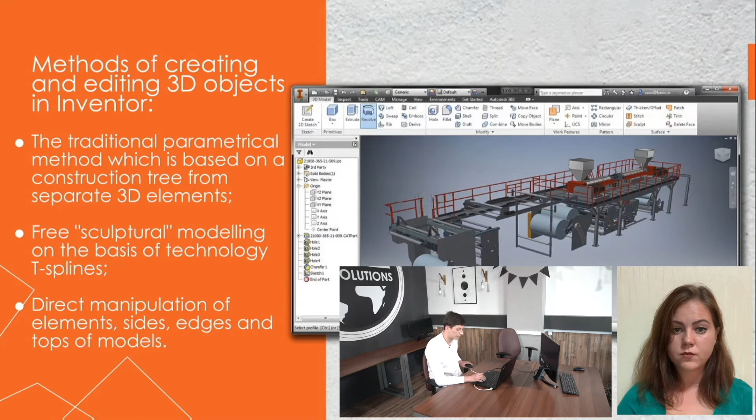Let's consider what possibilities are offered to us by developers from Autodesk and the other systems. Autodesk Inventor is a computer-aided design application developed by Autodesk. It does 3D mechanical design, simulation, visualization, and documentation. Autodesk Inventor has an intuitively clear interface and supports various methods of modeling of 3D models of any complexity. It is possible to flexibly combine solid state and surface modeling, and also models as a triangular grid.

Almost every three-dimensional operation is based on one or more sketches. Autodesk Inventor is equipped with the most powerful area of 2D and 3D sketches, allowing creation of profiles and trajectories of any complexity.

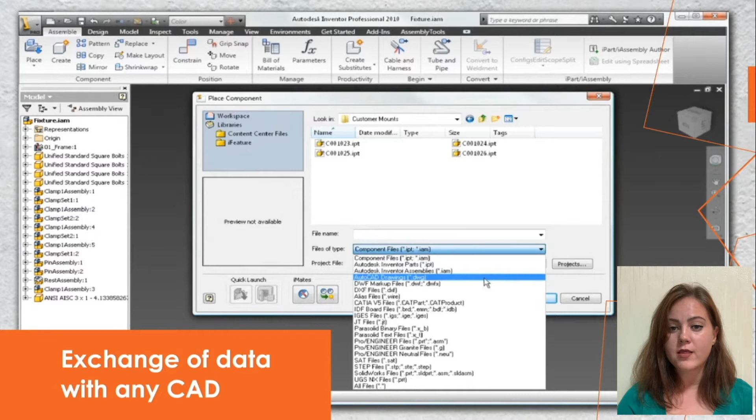Autodesk Inventor allows, as quickly as possible, collecting components in one assembly for research of parameters and functionality of a product. In the assembly environment, there are tools for search of crossings, visualization, and analysis of kinematics of the model. It automatically forms and updates the product structure in the project development process.

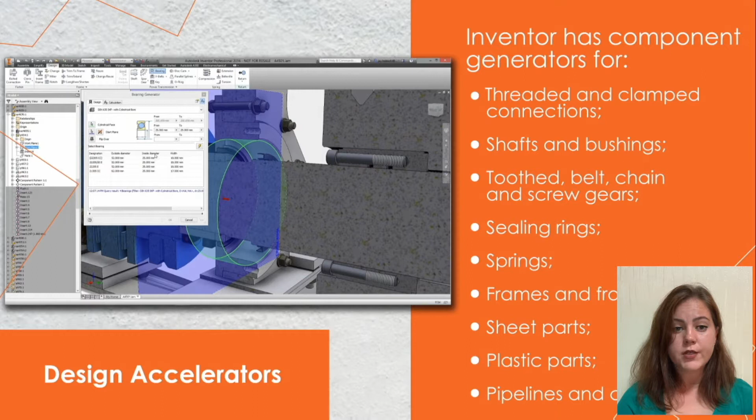Autodesk Inventor supports a set of file formats both on import and export. It is possible to open directly files of the majority of widespread CAD from foreign manufacturers, as well as neutral formats. In this case, it is possible to continue editing this file in the initial CAD, and the user of Inventor who has inserted this file into the assembly will immediately see any changes made to it.

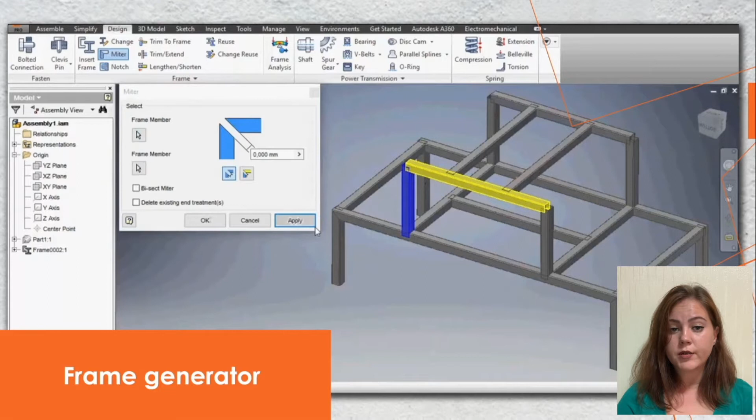The set of design accelerators is based on standard mathematical formulas and physical theories used in the design of various mechanical systems. Based on functional requirements for a mechanism, generators automatically create a 3D model of the required typical component. In the design of parts and products, parameters such as power, speed, torque, material properties, operating temperatures, and lubrication condition can be set as input.

Inventor's frame generator automates the development of steel frame structures with a set of specialized tools and a library of standard profiles. The module provides the location of profiles on a given frame, the use of various methods of connecting the profiles, and the application of welds.

The module of designing details from sheet material in Autodesk Inventor is equipped with a rich specialized toolkit. Besides work with a sheet, there is a library of sheet styles. Also, this module automatically builds a detail sweep, supports its associative communication with a detail, and supervises correctness of constructions.

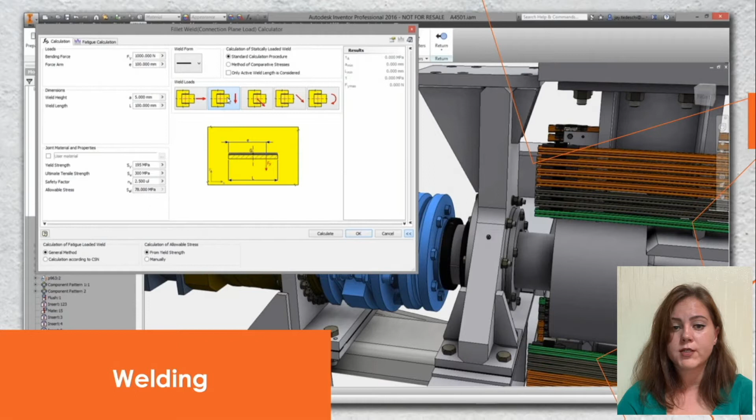You can also automatically create internal and external processing contours, manage contour sorting by layer, transfer the model coordinate system, and enable spline approximation. In Autodesk Inventor, there is a special environment for designing welded structures, including functionality for pre-processing of a product, cutting of edges, drawing various kinds of welded seams, and finishing machining of the welded product.

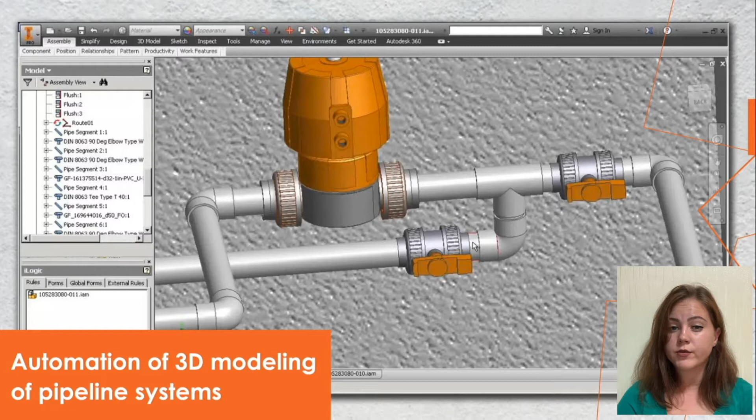The module is equipped with specialized tools which provide a visual representation of welds on the three-dimensional model and drawings. For creation of three-dimensional models of pipeline systems, Inventor Professional also has a special internal module. It allows creating the shortest and most efficient routes of pipelines, providing full associativity with surrounding geometry of a product and observance of construction rules set by the user.

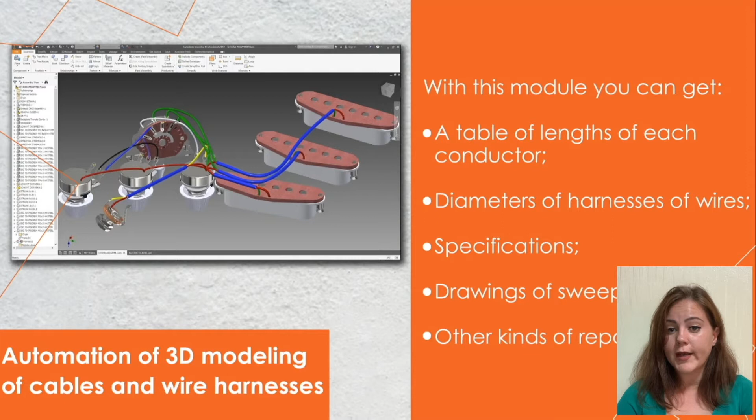The cable connection design module in Inventor Professional provides the easiest and most convenient way for mechanical and electrical designers to work together. The table of connections can be set in Inventor Professional, or imported in XML format from specialized electronic CAD software, for example AutoCAD Electrical. The module is equipped with specialized tools for construction of routes and associative binding to surrounding geometry.

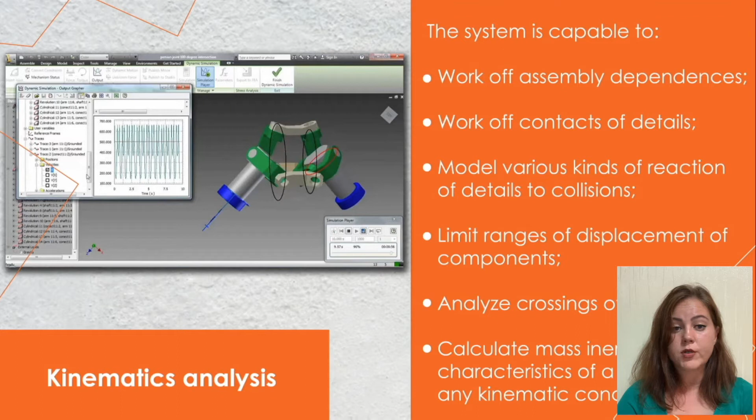Autodesk Inventor allows you to investigate kinematic schemas of projected mechanisms directly in the modeling environment, at the level of geometrical dependencies between them. The results of the analysis can be obtained not only as 3D visualization, but also as automatically generated charts and reports, with results uploaded to Excel.

Autodesk Inventor Professional is equipped with a module for durability analysis using the finite element method. With this module, the user can simulate the behavior of a detail or assembly under loading, determining the presence of deformation, its degree and character. It allows not only finding weak points of a design, but also optimizing products, for example saving material by removing surpluses in places where it will not affect durability characteristics.

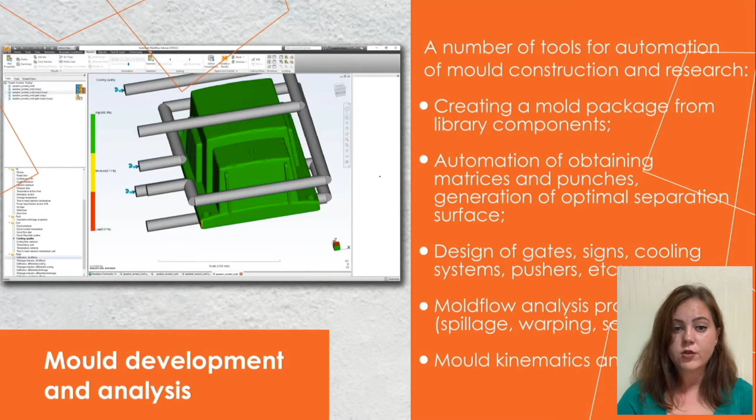In Autodesk Inventor Professional is built a specialized module for automation of construction and analysis of molds for molding plastic under pressure. The module is equipped with a library of components for compression molds, and a number of tools for automation of their construction and research.

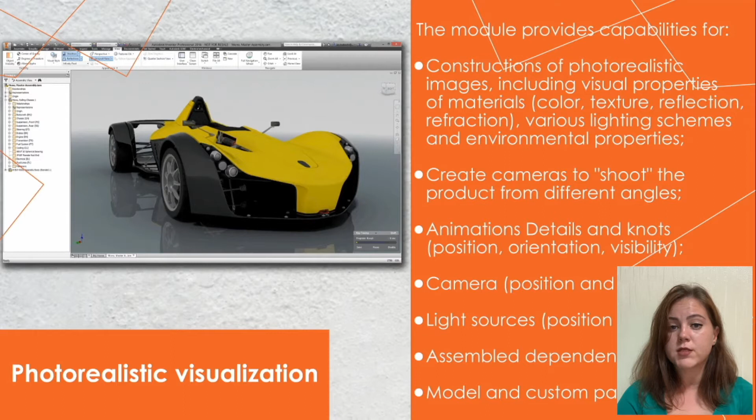Working directly in Autodesk Inventor, it is possible to create photorealistic images and animation rollers of your products by means of Autodesk Inventor Studio. It has rich functionality and a simple, intuitive interface that considerably reduces the time expenses for preparation of presentations.

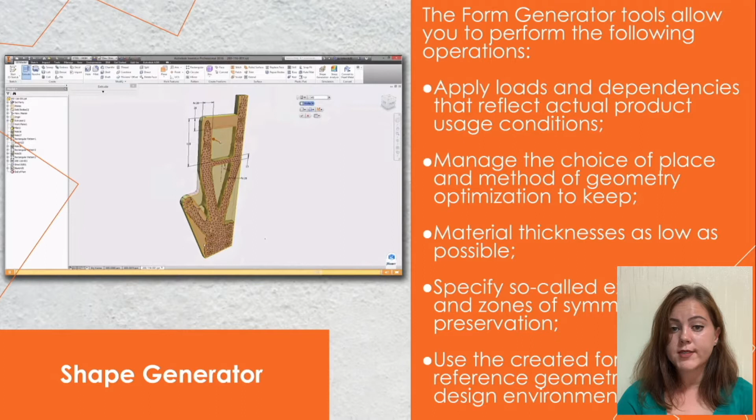Shape Generator allows you to automatically generate the optimum form of a detail. The initial data is taken from a user-defined set of fixtures, loads, and other boundary conditions. You can use this module to explore design possibilities early in the design phase, and to optimize the shape and weight of already designed parts.

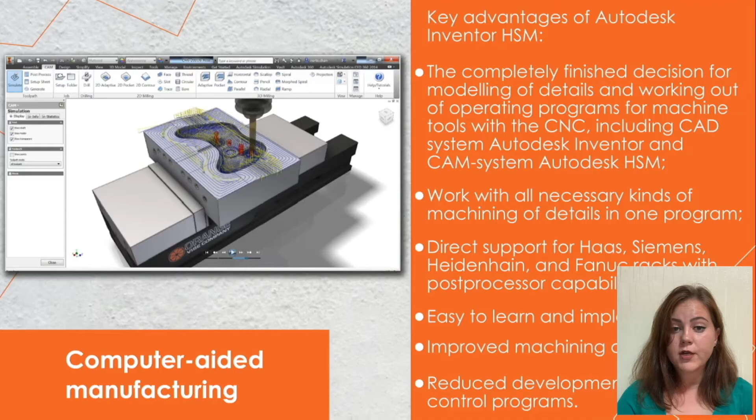Autodesk Inventor HSM is the CAM system integrated into the CAD system Autodesk Inventor, intended for working out and verification of operating programs for machine tools with CNC. Autodesk Inventor HSM can be successfully applied both in laboratories and in design services of industrial and repair enterprises.

So, now we've talked about Inventor. Let's talk about what SolidWorks is. I will tell you in a few words what it is, in comparison.

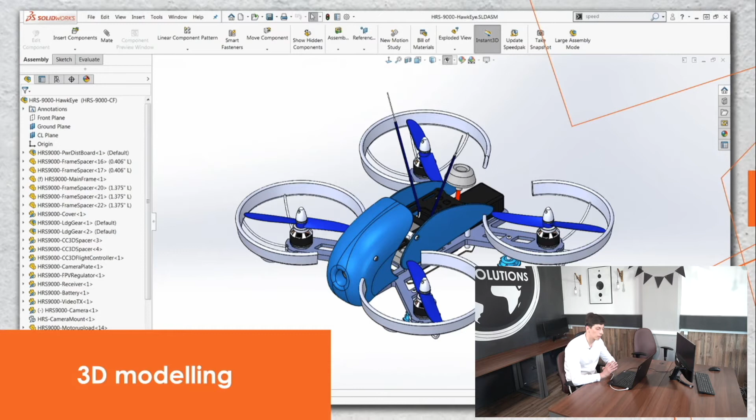SolidWorks is a solid modeling, computer-aided design, and computer-aided engineering computer program. SolidWorks includes up to 10 basic configurations, in which several dozen application modules are combined. In addition, there is a separate set of different options for each license, which would require a separate webinar to review.

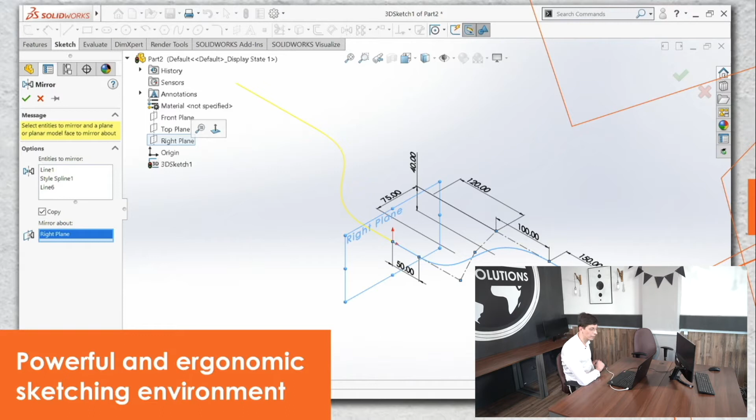So, in a few words, we begin with 3D CAD. It is the backbone of the entire SolidWorks suite for industrial designers and manufacturers. SolidWorks is easy to learn and rich in functionality, helping you speed up your product development cycle, lower cost, and ensure high quality.

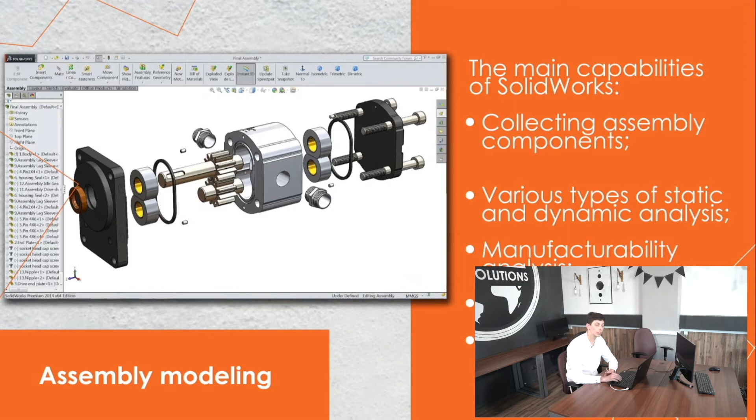You can create not only solid models, but also import, create, and manipulate surfaces, and generate 2D drawings from 3D solid models. With fully integrated drawing, your team can create drawings right from the models, ensuring accuracy and preserving correspondences. To make drawings in SolidWorks, you generate them in the 2D drawing and drafting systems.

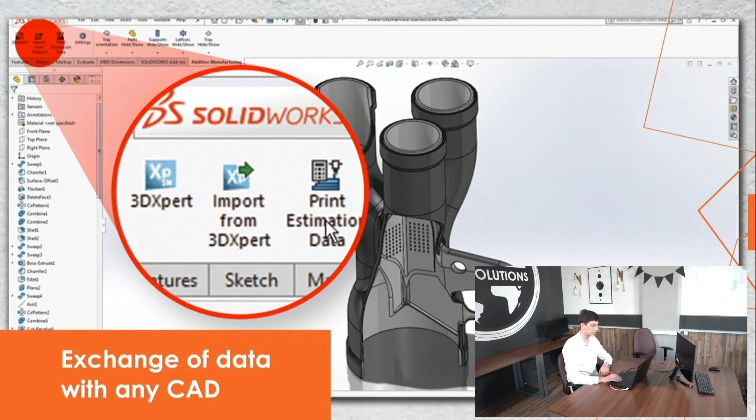SolidWorks allows you to build complex assemblies with many components. Assembly components can be comprised of individual parts or other assemblies, called sub-assemblies. An assembly can be created using bottom-up design, top-down design, or a combination of these methods.

For data exchange, SolidWorks supports over 30 formats for importing and exporting designs from other CAD programs, such as Unigraphics, CATIA, or Inventor. This procedure is also possible with other non-CAD programs, such as Adobe Photoshop or Adobe Illustrator.

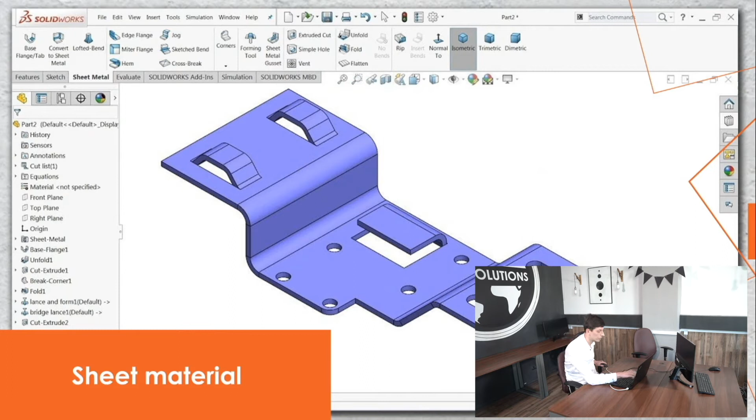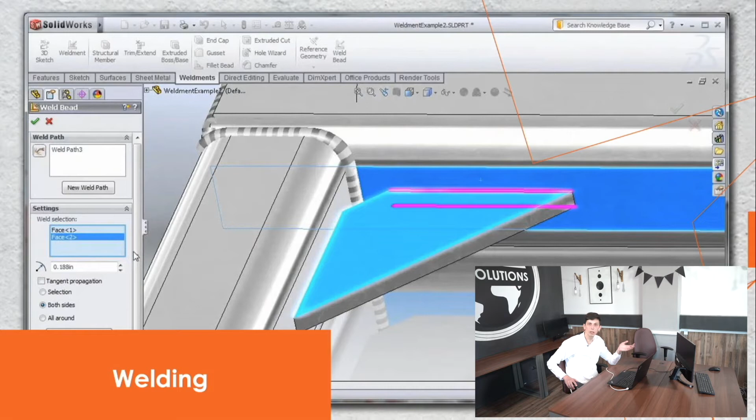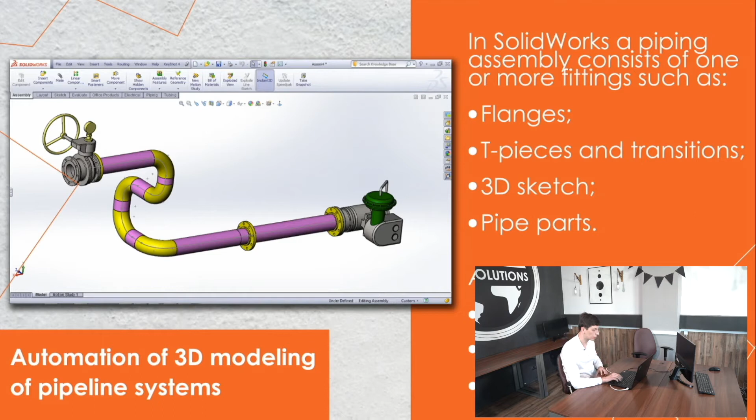Parts designed from sheet metal in SolidWorks don't require any reference to the parts of which they are composed. However, you can design a part within an assembly that already contains some components, or create a part by changing the parameters of another part in another document.

You can work with welding construction in SolidWorks by using weld beads. These calculations are made easier and more accurate by defining weld material, mass, cost, length, and time.

Next, typical piping. It consists of pipe lengths connected by elbows, T-pieces, and reducers, with flanges placed at the end of the pipeline. When a piping assembly is created, the application places it into the current assembly.

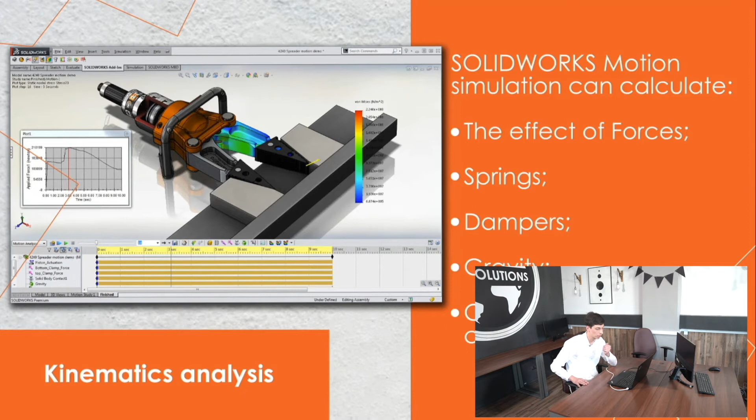In general, there is also an electrical part. Any electrical connector contains at least one connection point where a cable begins or ends. This principle helps you design connectors in SolidWorks, no matter if they have single or multiple pins.

Next, SolidWorks Motion. It is used to solve kinematic and dynamic rigid body problems. In this analysis, the designer performs an accurate physical calculation of the forces and movements of the assembly.

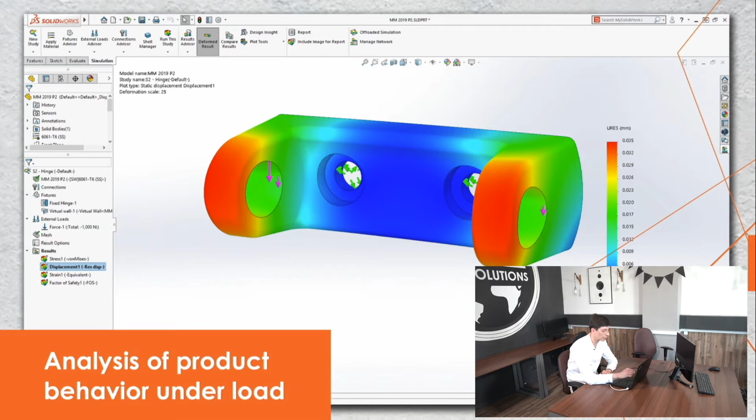By specifying loads such as joint force or acceleration, you can easily perform structural analysis of assembly components. The calculation of the safety factor makes it possible to assess the reliability of a fracture criteria-based structure.

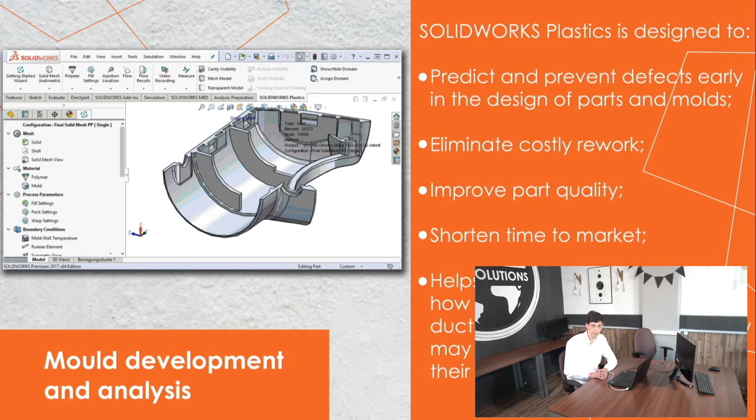After performing a static study, you can calculate the safety factor of the model. To calculate everything in SolidWorks, you need to know the mechanical properties of the material, know the loads on the part, and determine the restrictions on the propagation of loads.

Now, SolidWorks Plastics. It works directly on your 3D model, avoiding file format or compatibility issues. It is designed so mold designers are able to quickly optimize multi-cavity mold or feeding systems.

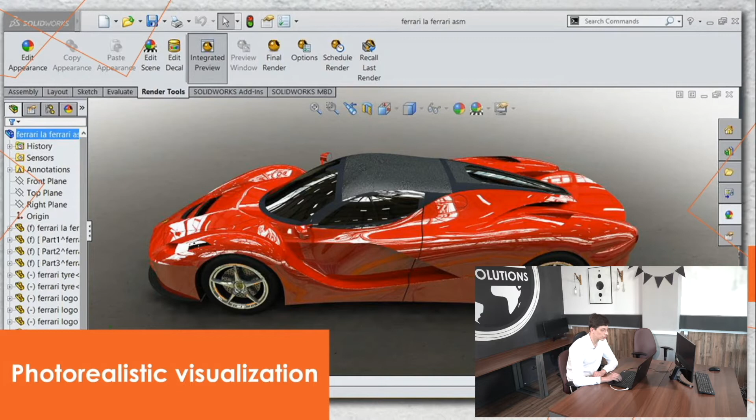Photo View 360. It is a SolidWorks add-in that produces photorealistic renderings of SolidWorks models. The rendering image incorporates the appearances, lighting, scene, and decals included with the model. This is an environment more similar to photography versus technical rendering, with the focus on 3D data.

Because results are indistinguishable from photos, they can be used directly by marketing or other areas where physical prototypes don't exist or would add too much cost.

Topology study. It helps you achieve maximum optimization of geometric parameters while taking into account design relevant constraints. As a result, you get an optimized component considering both mechanical requirements and manufacturing capabilities.

SolidWorks CAM. It is a 2.5 axis milling and turning solution powered by CAMWorks. It combines design and manufacturing capabilities in one application with a simple interface.

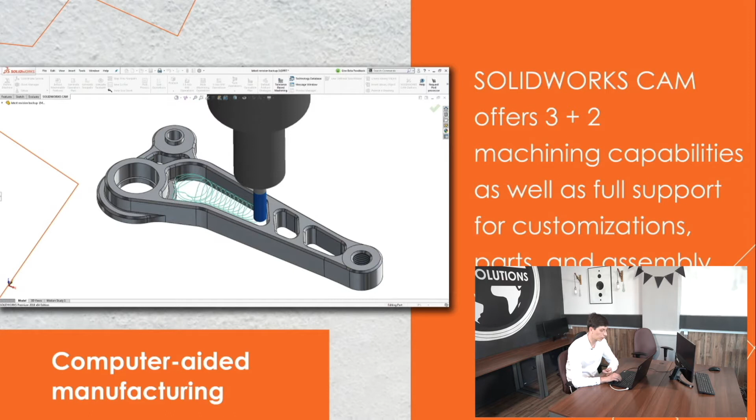The result is a user-friendly, rule-based system that you can use to save time and money by applying company standards, as seen in machining strategies and tolerances, reducing errors and improving quality in all machining steps. So that's all about the SolidWorks overview.

Listen, if I want to buy something, there is the question of costly licenses. How to understand such a complex issue? That's a really good question.

There are a lot of features, more or less important, and everyone has their own list of important technologies. We've tried to make some packages, and here is the result with the most important information for any engineer.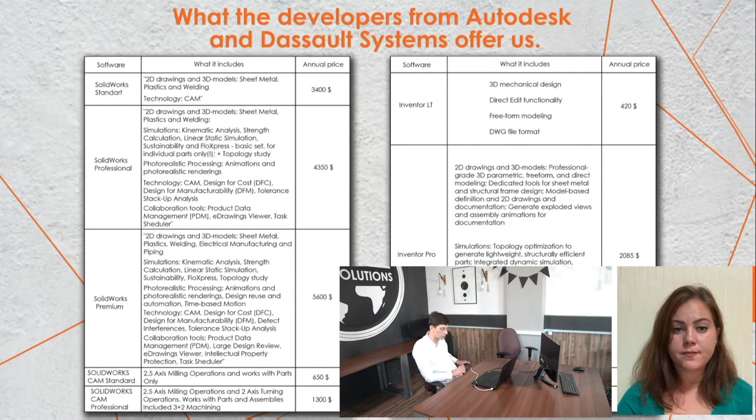Okay, now we know what these programs are and in what form you will be offered to purchase them. But nevertheless, for me personally, just information from the internet isn't enough. After all, whatever the manager buys, his engineers have to work for maybe 5 or 10 years with this software. So who knows if it's comfortable to work with, and which factors are important.

Vladimir, I think it's time to talk with our experts, Denis and Ivan. You are right, Olga, let's discuss it with them. By the way, they are here already. Guys, we're already waiting for you.

So, here are our experts. Hello, hello Ivan, hello Denis. Hello Vladimir, how are you guys? We are very good. Ivan? Great, great, nice. So let's start.

Yes, let's start. Guys, where did you work before GFE Solutions? What's your experience? Now I am a team lead engineer at GFE Solutions, but before I worked at several companies, and I have 7 years of experience. 4 of them were with Windchill and Creo Parametric software, and then I worked, as I work now, 3 years in Autodesk Vault and Autodesk Inventor.

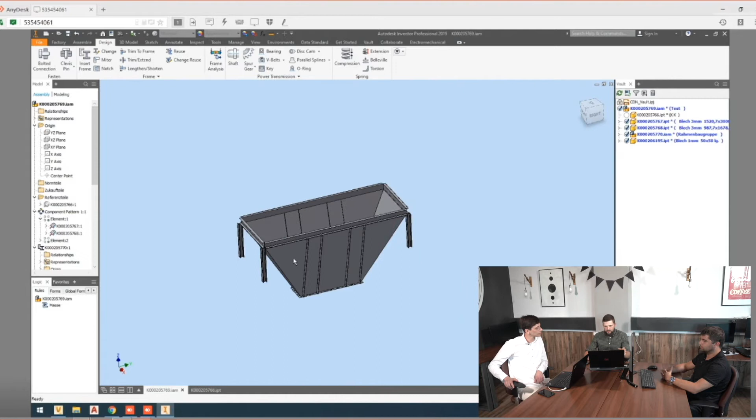I can show you how it works in Autodesk Inventor and Vault. Now you can see on screen just an example, one of our constructions. It's only beams and some profiles, and I want to describe the idea of work in this way.

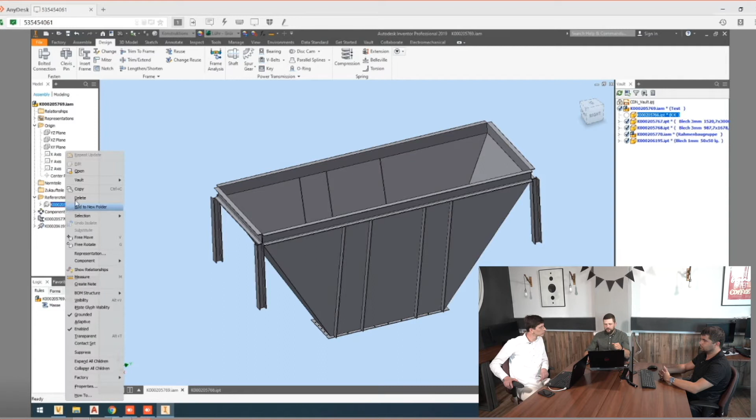You can see here that I have a basic part. I use the function derive, and I want to show you what that means. So I have one part where I have all planes, sketches, solids, and some surfaces that I will use in my construction, in my parts for the future. And I have this model, and when I update it, all my construction will update also.

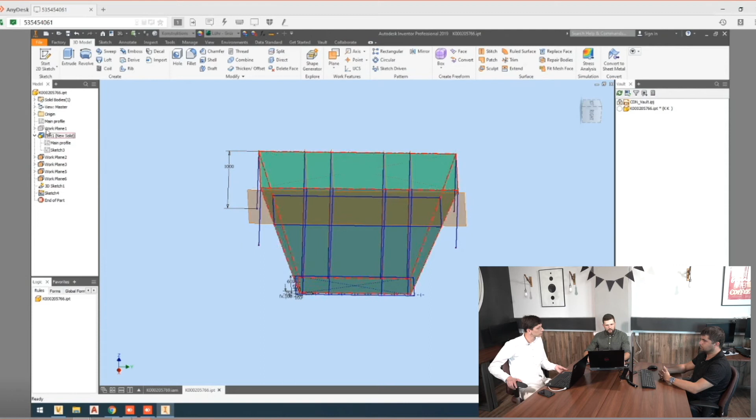For example, here you can see this model, with some sketches and planes, and my model looks like this now. If I just update some dimensions here, like this, and here like this, and maybe the height of this construction, so minus 1,500, and here maybe 800, so I update this a little bit, and here it looks nearly the same.

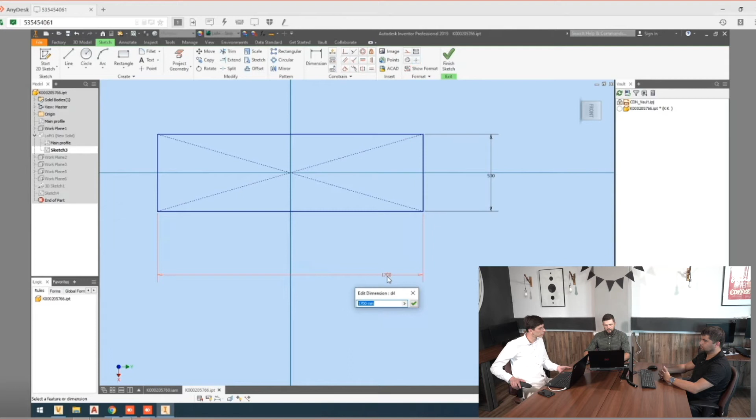But now I will just refresh my model, and here you can see that it looks the same, but with different dimensions. I can also, for example, change the bottom flange like this, so you can better see how it looks. And then I will refresh again, and you can see that it updates automatically. All connections stay the same, and you don't have any problems with intersection somewhere.

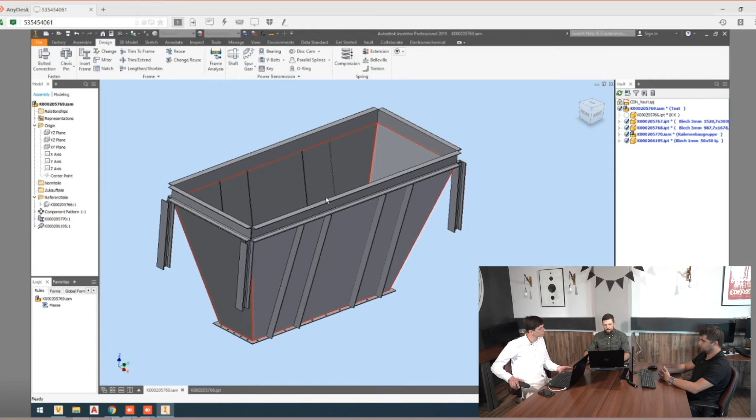So this is the idea of how you can use this basic part to create big constructions with a lot of sheet metals, a lot of parts. For example, I can show you how it works with a part.

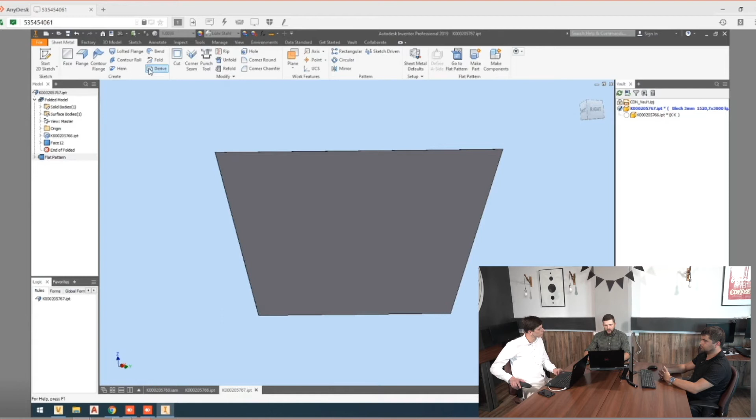When you have a basic part, you should first create parts like a sheet metal, and then you use this function derive, and you choose your basic part. When you get this part by derive, you can choose what you want to get from this part - some sketches, or maybe only solid or surfaces, and you will use only a part of this main part. So this is how derive works.

All this part will be assembled without any constraints. You just connect it together by default, and they will stay in the right position.

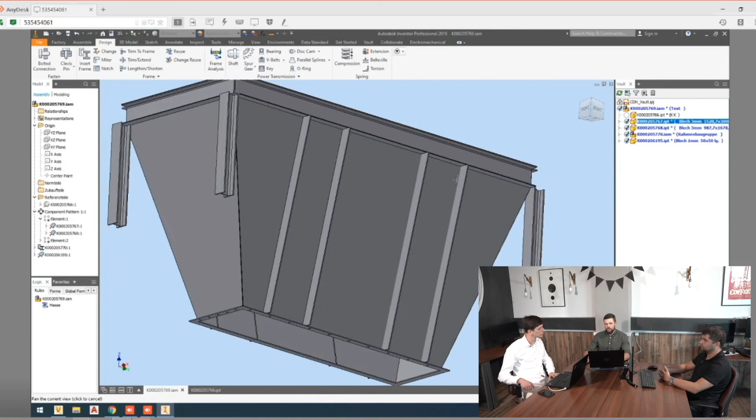And the second part that I want to describe is the frame generator, and in Autodesk Inventor it's realized very well. You can create beams and steel structure very fast, maybe in 1 hour if you have a basic part. You can create big constructions with all connections, and you will not have any intersections between them.

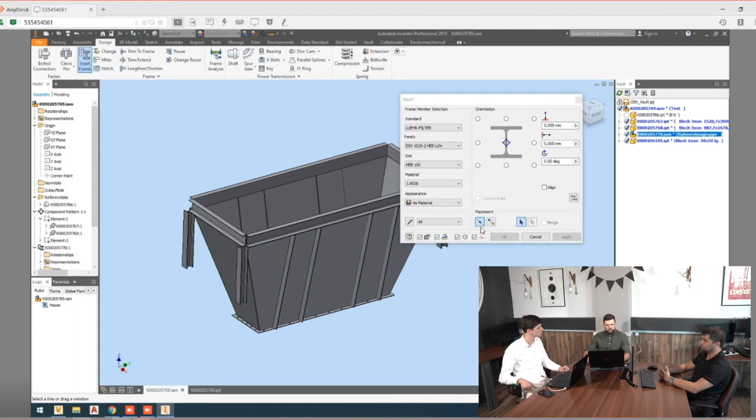So you can see here that this is a frame. This is a new sub-assembly that you will use, and you just need to click on the frame generator, choose some profile, for example like HEB, and then click on some geometry. I can show you if I have the basic part.

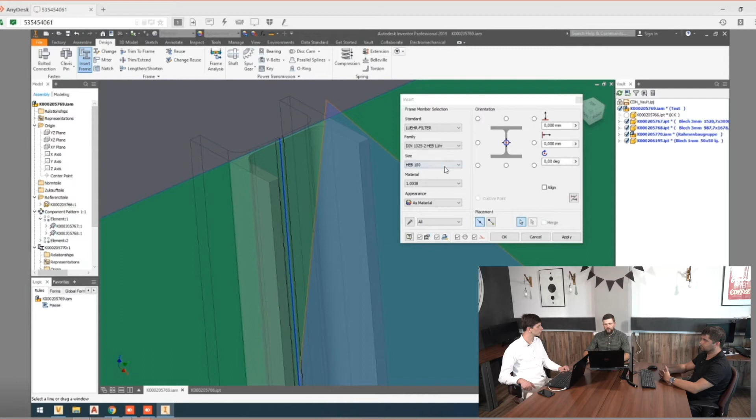Then I can just choose some lines, like this. And here you can see that I have a new beam. I can rotate it, I can change the height of this beam, type of this beam, and so on. And then I will just choose all lines, and then you can see what I have.

Also, I can reuse the parts if I create the first one, and I understand I have the same parts, maybe 20 parts the same, and I don't want to click on all of them like a new part. So I want to say this is one part and all others are the same. I can use the function reuse - I just click on one part, then choose the same lines with the same properties, they should be equal, and then I will create these beams the same.

And also here, of course, you have a lot of functions that you can trim it. You can shorten your beams like this, you just click here, and then minus 200, and it cuts automatically, and all reused parts were also cut. Sometimes you have not the right orientation, but you should click on change reuse, and then you can rotate your part, and it will be okay.

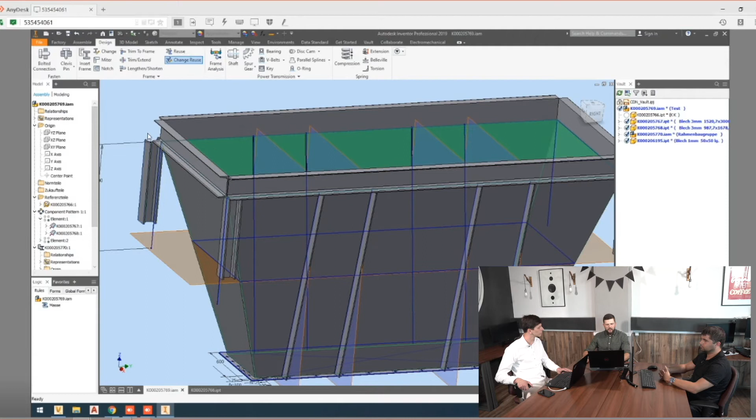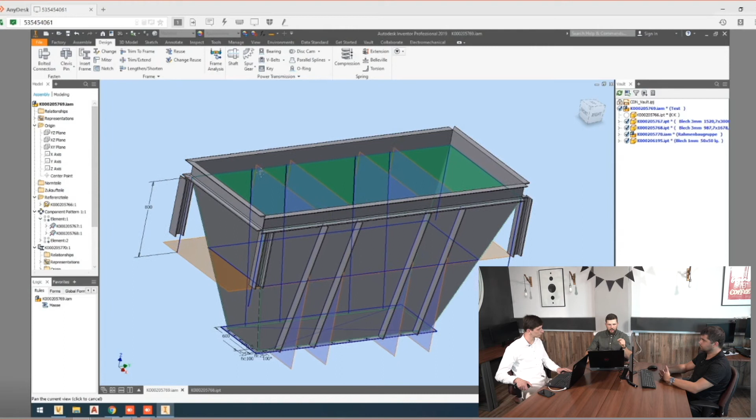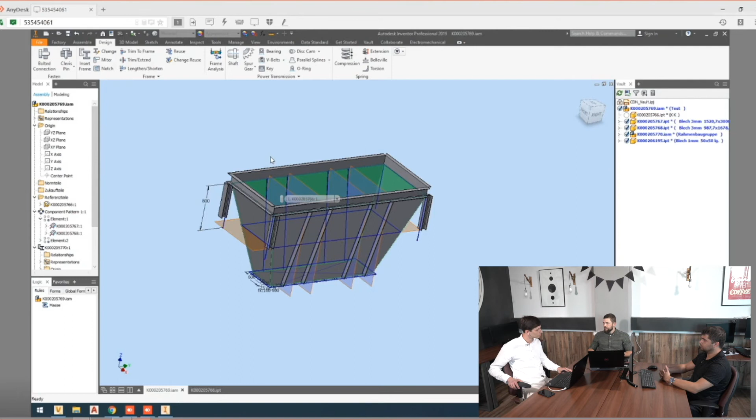You can create easy connections between all of them, and it will automatically cut your beams in this way, like you see on screen. So if you use these two types, a derived part with basic part and a frame generator, you can create steel structures with sheet metals very easily. The main idea is that you can fast change the dimensions of the construction, maybe delete something, add something, and do this in one minute. It's very easy. This is the main idea of how we worked on previous projects, and we continue to work like this now. I begin feeling like a real constructor.

It's interesting, how is it in comparison with SolidWorks? Ivan, what do you think? SolidWorks has the same...

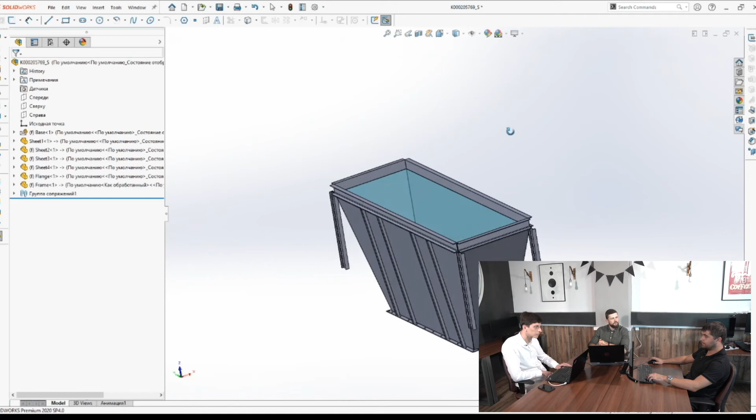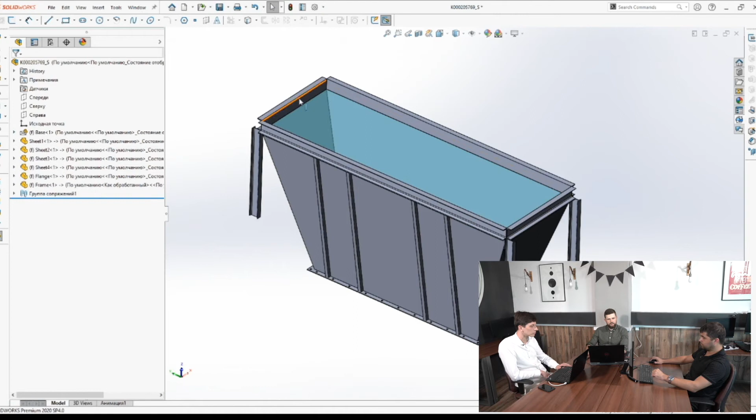Possibilities, but as I have experience in both of these programs, I want to show you differences between them. As you can see on my screen, I create the same assembly like Dennis, but the way of this construction is different. I create a base component, but I don't use a derive option. It's like other parts, but I turn on envelope mode, and in this mode it automatically excludes this part from BOM, so it will not be in BOM. After this I create sheets on this base part, and that's a difference.

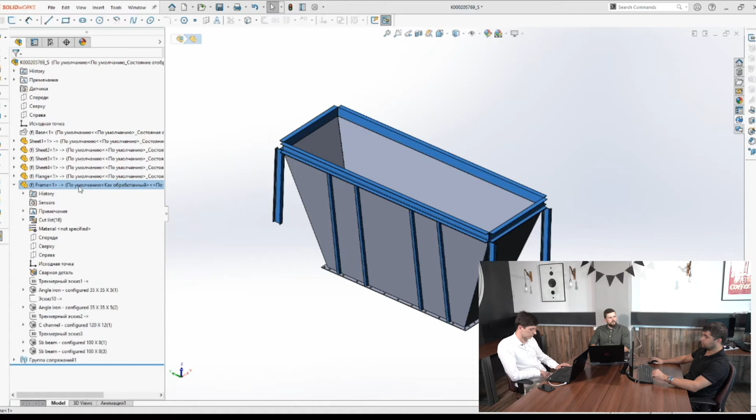What about frame? I hide the frame component. I think it's much better in Inventor, because in this case I create a new part, but in Inventor it's a new assembly. I think it's the main difference between these CAD programs.

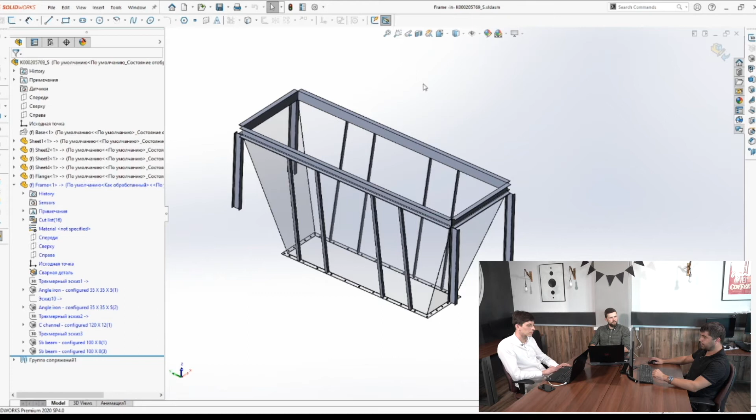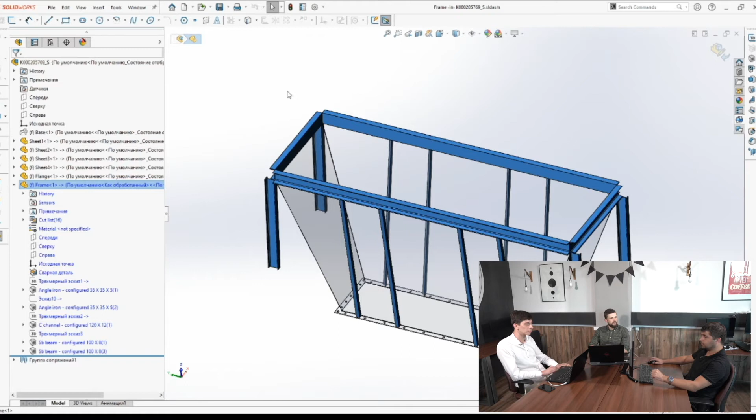So when you create some frame in SolidWorks, we create the same sketches, and on this sketch we create some details like in Inventor, but in BOM this part will appear like one part, while in Inventor it's different parts.

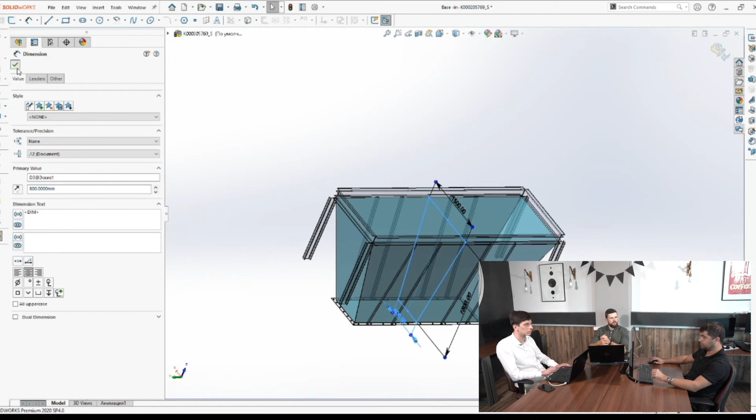So I think that's the main difference, and like in Inventor, I can show you how I can change dimensions of this part, and it automatically changes the whole construction, like in Inventor. I can change this dimension and others, and this automatically updates the whole model.

One moment. So you can see that it's updated. So this looks nearly the same way, but in Inventor we have an assembly with parts.

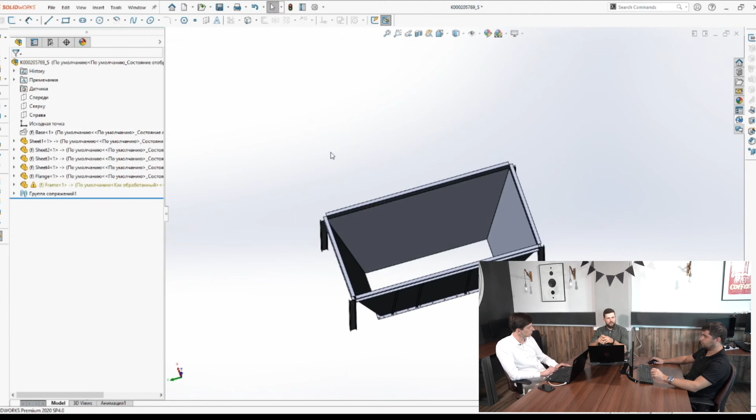From each beam, yes. In SolidWorks we have only one part, like one solid, and you can see it's just for other engineers so they can see what you will have in the future. So they can use it not like a sketch, but like a basic element, so they understand the frame will be like this. Yes, because in SolidWorks I use a module of weldment, so SolidWorks thinks it's one part with weld, one welded part, and in Inventor it's another way to create it.

Okay, so you already see the first difference between the CAD programs, but let's go to the next question. You worked separately, one engineer per project. What about working in a company of engineers, like a group of engineers? How is it realized?

Yeah, of course. If you want to work with 3, 5, or 10 engineers together, you should think about how they're connected together, because if you just have a stick and go from one computer to another, it doesn't work. So you need to think about what you should do. Of course, people from Autodesk and SolidWorks and other companies already thought about this, and I want to show you how it works in Autodesk.

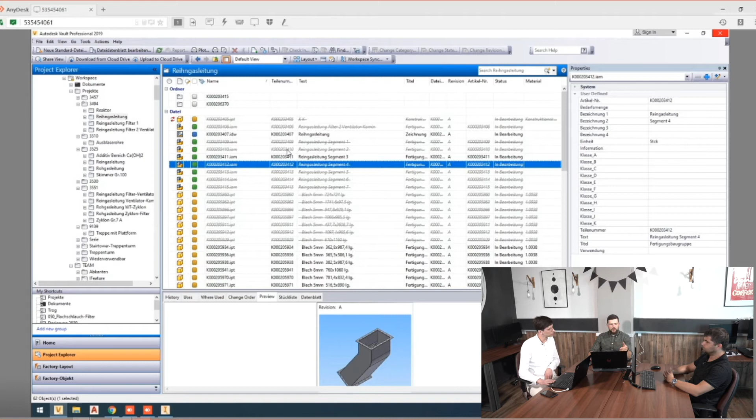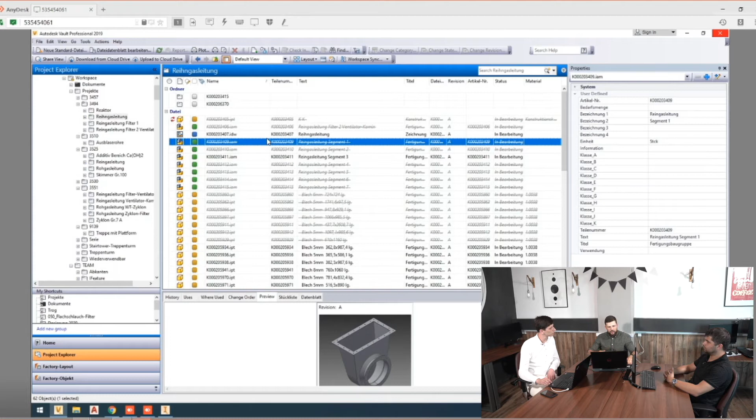Seems a bit complicated. For Autodesk Vault, if you look at it the first time, it's not so easy, but they have a browser version, and you don't need to understand how Inventor or Autodesk Vault works. You just open the browser, log in to Autodesk Vault, and you can see the same things, and open some files if you have a viewer. You can open the models, open drawings, and you don't need to understand anything — you just need a phone or maybe a laptop, you open it, and that's all.

So here, if we want to talk about Autodesk Vault, not the browser version, I can show you what's the main idea here.

You can see here some assemblies, parts and drawings, and when you work together with a couple of engineers, you all should know who works on this at which time with which parts. You can see that this crossed-out part tells us that someone worked with this. You can of course open it, but you will not see the last version, because the last version will be with one of the engineers. He's now working with this.

Only he can upload the last version to the server, to this Vault, and other engineers can just open it. But if you want to work and have rights for this part or assembly, you can click checkout, and now you can see that I have permissions and access to upload this assembly back to the server. That's how it works.

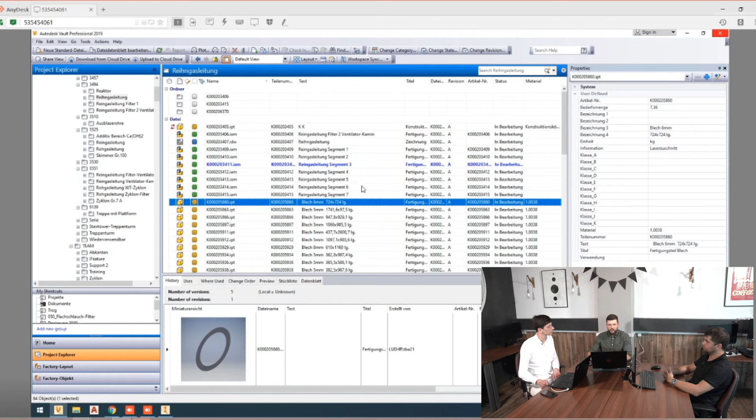And if you have nearly the same constructions, and you just need to change the dimensions, one profile for another, delete some sheet metal, but it will be nearly the same in general, you can use copy design, and it's a very fast way to create new constructions. You just need to click on the main assembly, like here for example, and click copy design, then choose all parts inside this assembly, click copy design, and it will create a new one with new names, but with all connections between parts, assemblies, and drawings.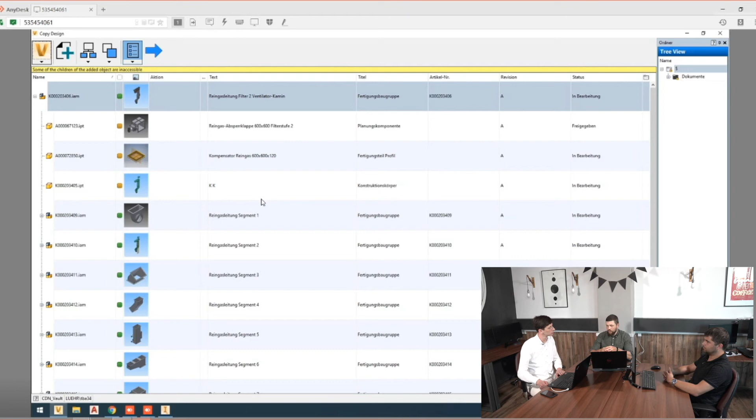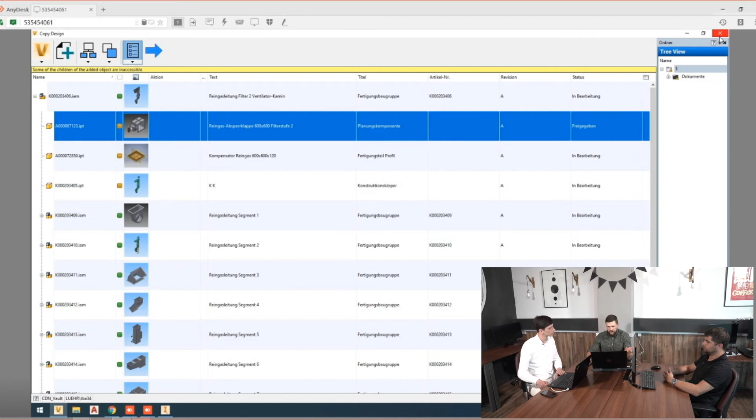And if you don't need to create all new ones, you can just say please create this and this new one, and for this part please reuse. So it will get the version from the original, but create new parts for all other assemblies or drawings. This is a good way how it works.

Yeah, of course I can say a lot about Vault, but we don't have enough time to say about all of this, so I think for the first overview it's enough. Yes, I also think that it's enough for a first review. And now let's compare it with SolidWorks. Ivan?

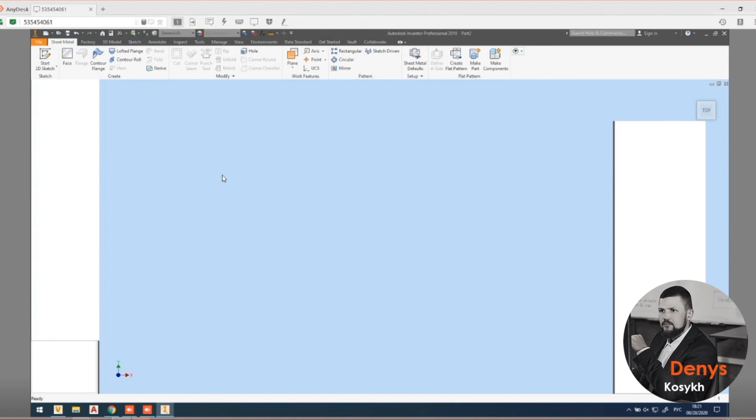You can create 3, 4, 5 templates for sheet metal, also for other parts like shafts, or for assemblies, but I can show you only the sheet metal example.

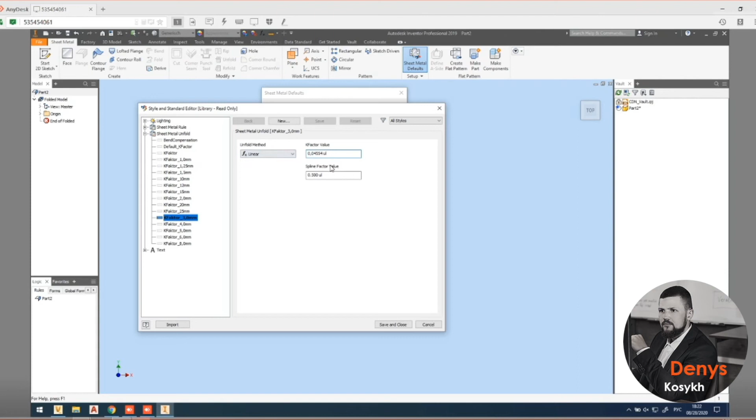What you can customize here: you can add a couple of materials that you want to use in your company, with some properties and mass, and for each of these materials you can also set a rule for bending. We know you have some K factor, and different companies use different K factors because of their bending machine, so you can set it for the instrument you have in your workshop, and it's very useful, I think.

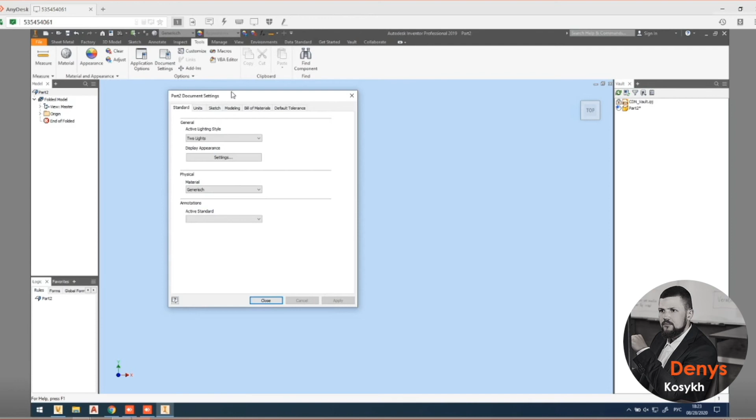Then it will automatically create the right flat pattern with the right dimensions for bending.

Then you can also customize some settings in tools, you can open the application options, and here there are a lot of paths you can upload, telling it to get something from a file.

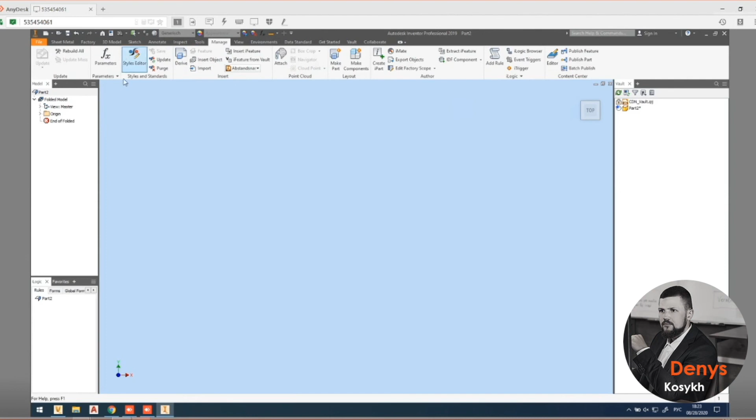What else? You have the styles editor, where you can... this isn't a good example, let me open the drawing and show you there.

You can customize here title blocks, your formats, and in Manage, in Styles Editor, you can create as much different types of lines of text as you want. You can customize your parts list with a lot of columns that you need, and weld symbols, and you can also customize for each company. If you create something for one company, you can use standard styles for GFE solutions. If you create for another company, you can customize it for them. So it's a lot of possibilities to create exactly what you want, not only standard that you have.

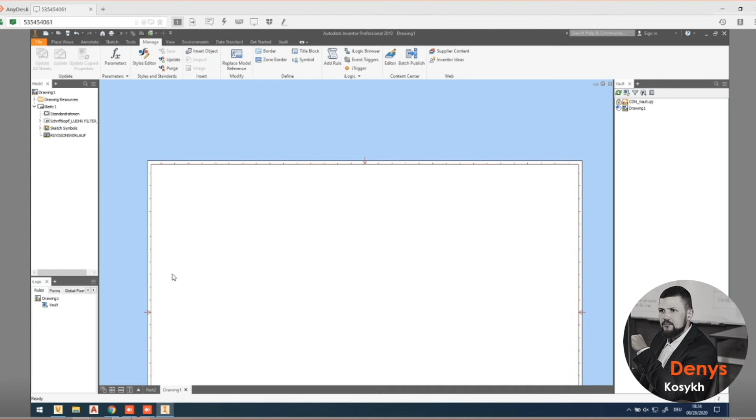So yeah, this is in general what you have and what you can add to your work when you work with Autodesk Inventor and Vault with your team. Yeah, this is all.

Okay, that's really interesting. But I want also hear some features about SolidWorks. Ivan, listen to you. SolidWorks has the same functionality, but I think in SolidWorks it's a little bit more difficult than in Inventor to create something like this, because in Inventor we have projects. When you change projects, you change all of templates, drawing, assemblies, and other.

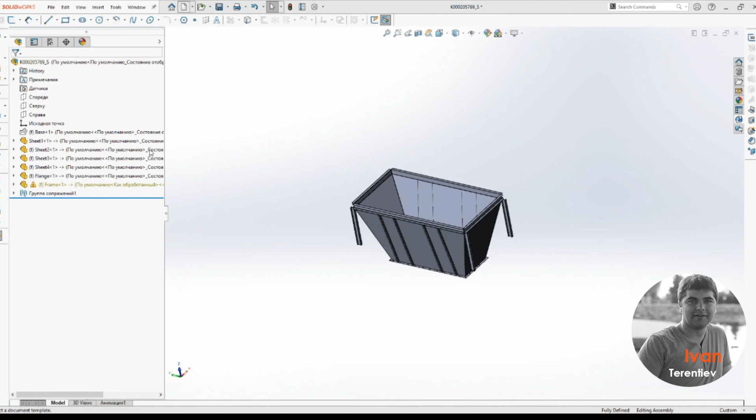But in SolidWorks, you should change it manually. So I can show you. When you create a new part...

One way it's I like it very because it's I think a big advantage in SolidWorks, because I can customize my workflow. I can make some different toolbars, and I can move it from other sides of my screen, as you can see on my screen. And I think it's a very good advantage.

I very like it. For templates, I can create some templates for this part. I can change, probably make custom document units and other settings, and after this I can save it and choose here part template.

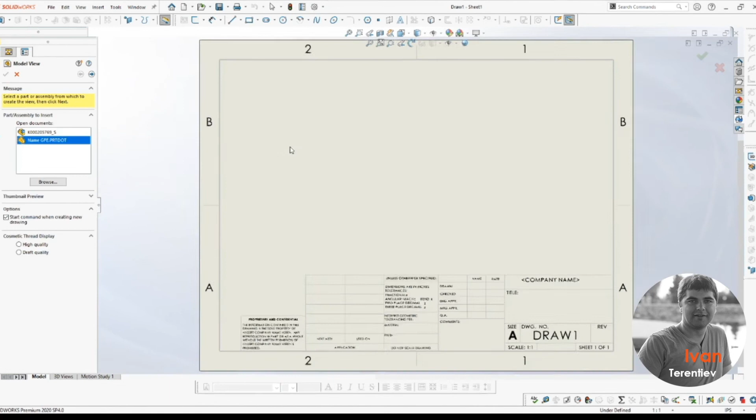And I can name it by my company, for example GFE, and I save it. So when you create a new part, you will have this template. I think it's an advantage. And for example, in drawing...

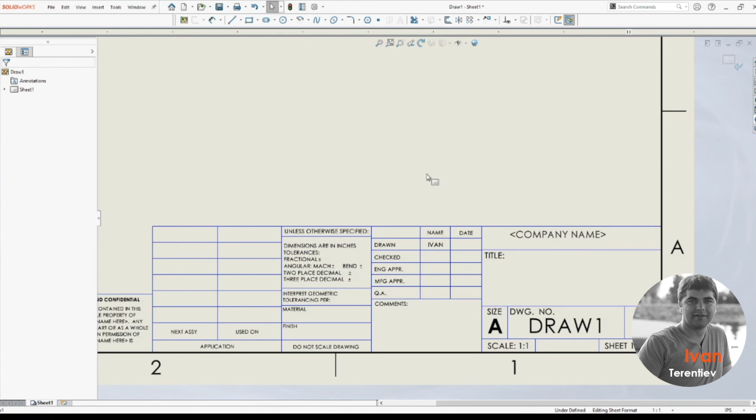When you open drawing, you can change here your sheet format, and you can paste it probably your company logo, probably if template will only be yours, you can write your name and surname. And when you create a new drawing, it's already pasted.

It's like a template. Yes, yes. So I can save it like a template, use the same. It's nearly like in Autodesk Inventor. I think you can create a template first, yes, and then you can use it for all drawings. Yes, so if I create a new drawing, I already will have the same properties.

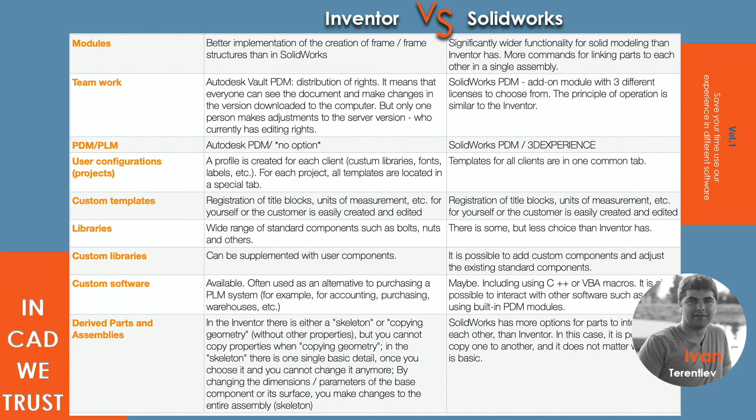I think it's interesting. Cool. Yeah, I think each engineer will say that if you ask me what software I prefer, he'll say he likes the software that he works with now. Because when I started to work with Inventor after PTC, after Creo Parametric, I said, oh no, I don't like Autodesk Inventor. It's very bad. I don't like it, I can't work here. But after 3 years, I can say that yeah, it's very useful.

It's very good. A lot of details I have here, and we can customize everything, and we can work together without any problems. And each engineer in my life, in my experience, says the same, because you don't want to have something new.

You understand that you already have a good software, and why do you need to study something new. But the main idea that we want to show is that at first you should think about what manufacturer you have, for what company you create your constructions. Then you can understand what software is better for you.

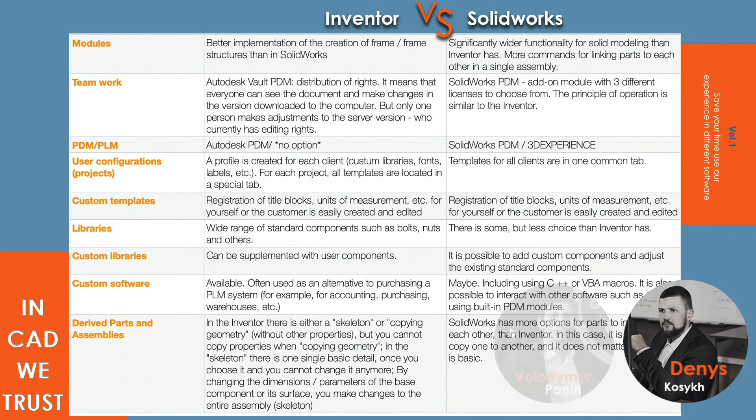So yeah, this is what I want to say. Remember these wise man's words. That's a good advice, I think. Yeah, that's a good end of our conversation, actually.

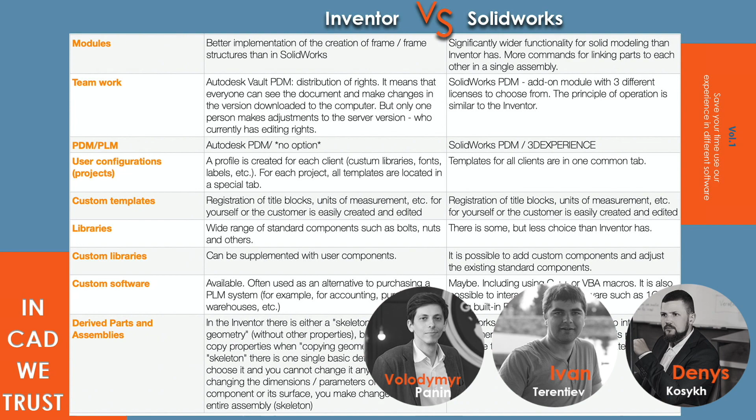So, let's see the complete picture. And as you can see, each program has its own plus and minus. Some of the software has cheaper licenses, some has versions for different devices. But as they say, there is a buyer for each product.